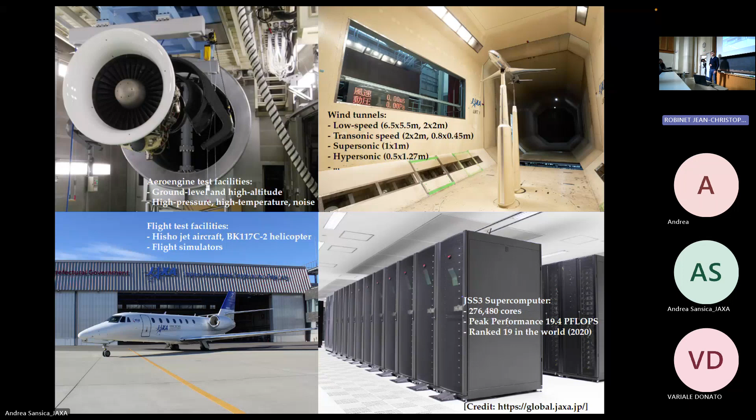We have big projects that I summarized this way. The one that I'm not going to explain in full, but the one that most of my activities come from, is this SkyDX. The objective is to drive digital transformation for the entire aircraft lifecycle.

What we mean by digitalizing the aircraft lifecycle: we have roughly 5 phases in the aircraft lifecycle - design, certification, production, operation and maintenance, and disposal. The objective is to create and provide simulation tools that aim at reducing, not replacing, physical testing.

So if we create a so-called digital twin from each of these phases, we want to do simulations and testing on the virtual model that is going to be much cheaper and quicker. But today, there are many projects, and I am mostly involved in the certification by analysis part, so that's what I'm going to talk about today.

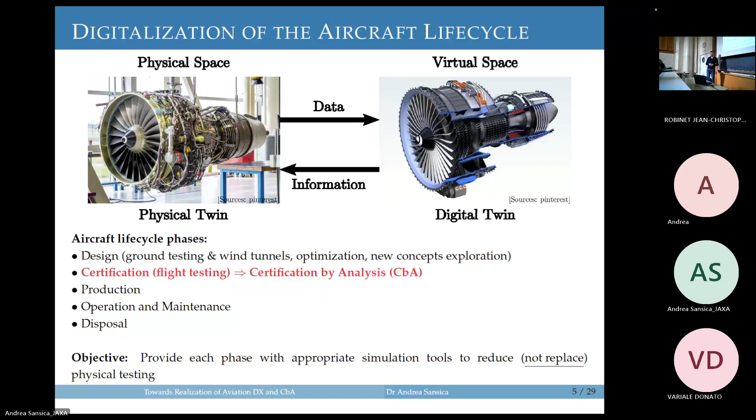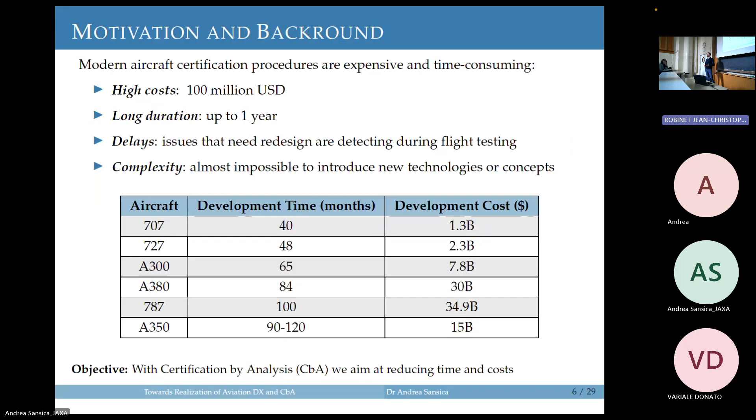And specifically, certification can take a big bunch of this development time and costs. Often during certification, during flight testing, we find some issues that require redesign and then cause delays. The systems are becoming more and more complex, and it's very difficult to introduce new technologies. So CbA targets these problems, and the idea is we want to reduce time and costs - certification by analysis.

So we have two streams of research activities at JAXA. The first one is trying to regulate CFD for those regions where CFD is working well. And the second part is trying to extend CFD to the whole flight envelope.

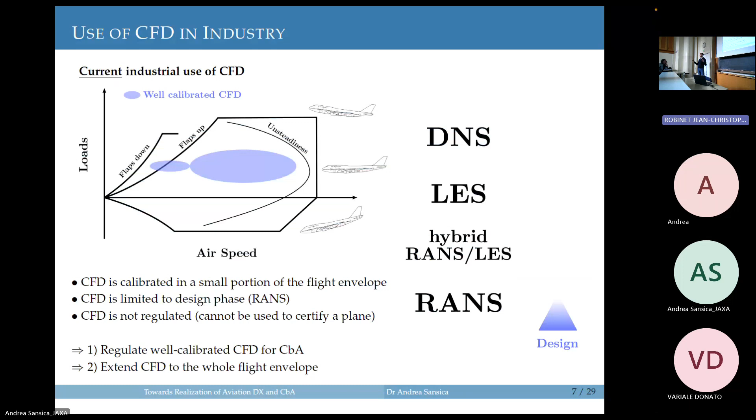For the regulation of well-calibrated CFD, we recently created this project called ChainX. It's coordinated by JAXA and partnered with major industries like Mitsubishi, Kawasaki, and Subaru. Interestingly, the Japanese certification authority is also involved, because we want to propose standards and regulations for numerical simulations, and at the end of this project we will also have a simulated certification review.

So we want to put everything in place so that numerical simulations can be used for certification. But that one is a bit more documentation-based, administration-based, regulation-based, and not so research-related, let's say. Extending the flight envelope is what research activities actually aim at.

How we want to achieve this extension to the whole flight envelope is by increasing access to HPC and using modern solvers with modern architectures. We want to move from only RANS to a little bit higher fidelity methods, and use them not only for design, but also for certification.

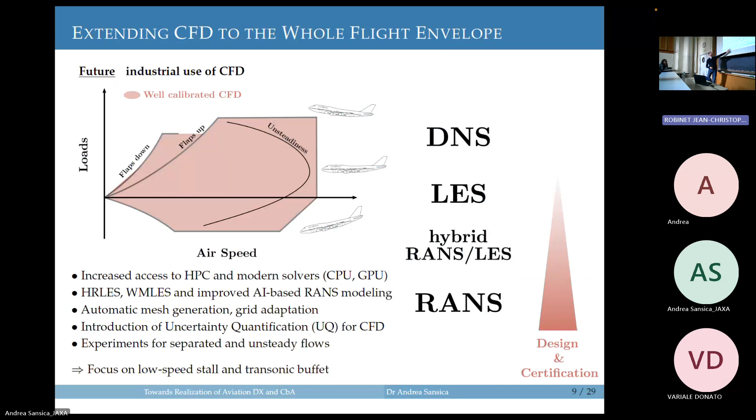So for the sake of this presentation, I will focus mostly on these two configurations: low speed stall and transonic buffet. Let's start with the experiments.

It's been more than a decade now that we have this transonic wind tunnel, which is a 2 by 2 - I should say 2 meters by 2 meters, because if you talk to the Americans, they think it's 2 feet by 2 feet. So it's relatively big.

We have the NASA CRM model, which is one of those we use for many experiments aimed at opening data. Over the years, measurement techniques have evolved, and we started from simply getting aerodynamic forces to now having unsteady PSP or high resolution steady PSP.

We provide this data for a domestic aerodynamic prediction challenge - pressure sensitive paint. It's like a high lift prediction workshop or drag prediction workshop. We provide data, it's domestic, but everybody performs the same simulations.

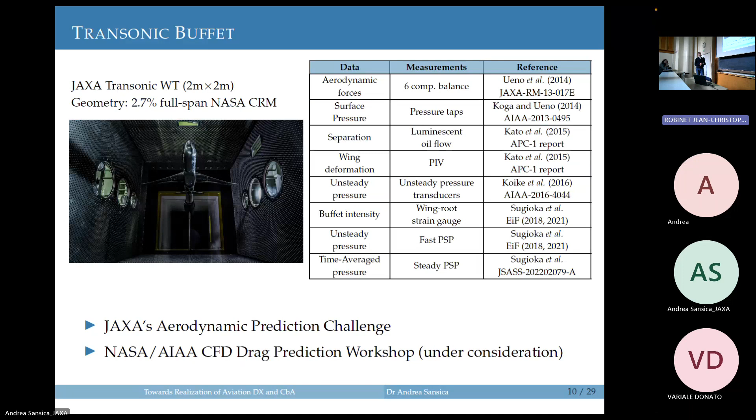Since last year, I had to organize this, and I decided to move from buffet to stall, because most of our activities are actually on stall. It's been a big change, because in previous editions it was on buffet. So far this has been mostly used domestically within Japan, but I'm now part of the committee for the DPW, and the idea is that we provide experiments for this much larger workshop to compare against.

In 2025 we will do experiments, and again we will open the data for everyone, so that it can be used in prediction workshops, and also as part of some collaborations we have - trilateral collaborations with DLR and ONERA on CL max.

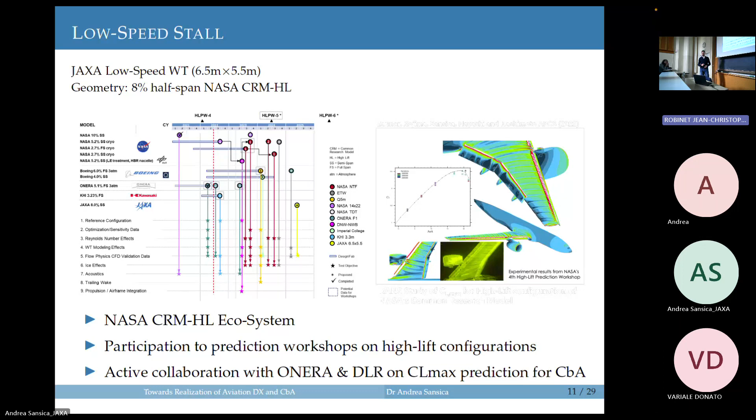But let's move towards numerical tools. A very rough grouping of different types of simulations - for CFD, if we want a little bit more accuracy, we probably would target multi-fidelity physics solving tools. It takes longer, but it depends on what you need to do.

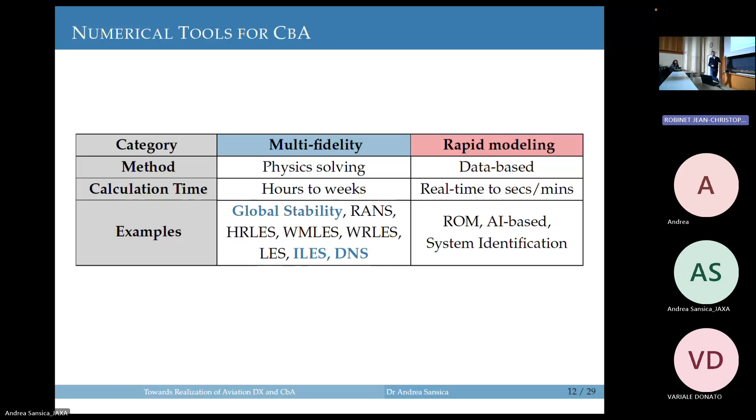I guess it's of interest, and a little bit on higher fidelity simulations. Starting with high fidelity simulations, this is the work that David Lusher did. He used to be a fellow who got a fellowship from the government. Technically he was in JAXA, but for the last couple of years he took OpenSBLI, a code he developed during his PhD, and extended the capabilities of this code to target buffet.

Now he has been hired at JAXA, and we want to do a similar thing, but for finite volume of unstructured grids.

I imagine you know how these kinds of things work, but I'll explain it quickly. We have the user specifying governing equations. As long as you can write it in index notation, in theory you could solve any equations. You'll specify input parameters, boundary conditions, and there are some libraries and availability. The code, the framework David developed, takes these equations and automatically generates C code.

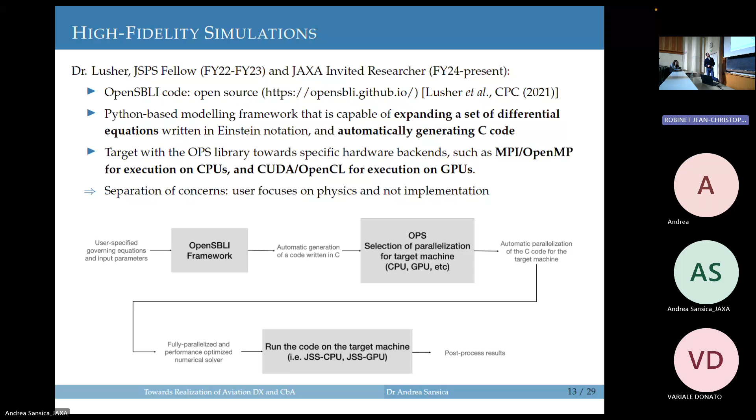At this point, the C code is sequential, and it's given to this domain-specific language library called OPS. It's developed in Oxford, for structured grids. You can select which target machine you need, and it will automatically parallelize your C code. Since these libraries are developed by software engineers who really know what they're doing, they're usually optimized for the target machine. Then once you get the code, you just have to run it and get your results.

Some of the simulations we could do with this tool - I call it implicit LES, meaning we don't have subgrid scale models, we just let the grid stay unresolved to introduce some dissipation - we also went up to DNS. We did calculations of up to 10 billion points, very large simulations on a relatively small number of GPUs. We looked at different sensitivities, at the appearance, intermittent appearance of these buffet cells. These were relatively simple geometries.

It's just an airfoil extruded with periodic boundary conditions. But yes, for CBA, as well as trying to understand more in detail about the mechanisms, we also use these large databases for model training.

In terms of outreach, we are writing some stuff. David won this award last year for this work he did, but now we are more focused on publishing. Some are already under review, some in preparation. We plan to present, if accepted, some of this work at IUTAM Transition. Soon, hopefully, this version of OpenSBLI will be released, and it's open source, so it can be used by anybody who has resources.

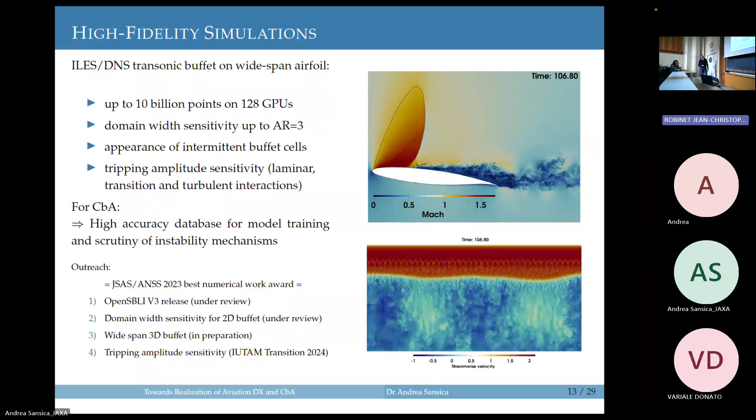Moving to stability, most of the talk will be about this. Now, I guess I don't have to explain what global stability is, but just for the sake of completeness, I'll go through it quickly.

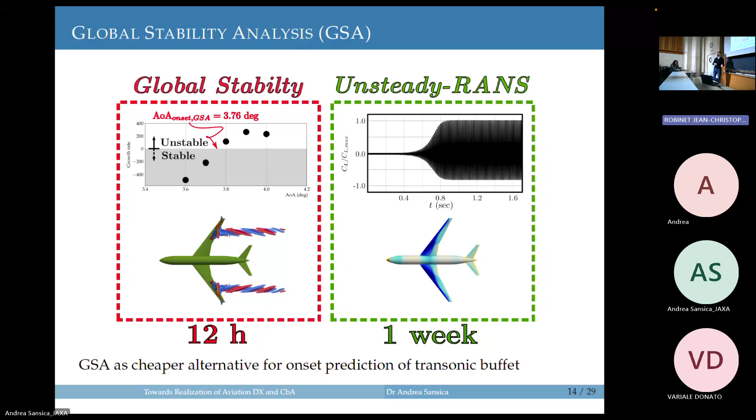We use it because for certain types of phenomena, like if we want to predict transonic buffet onset, if we do stability or more classical simulations like unsteady RANS, stability can give you a very large computational saving, especially if we are close to the onset, where these simulations will take a very long time before they settle and before you understand whether the case is steady or unsteady. GSA can be pretty useful in these cases.

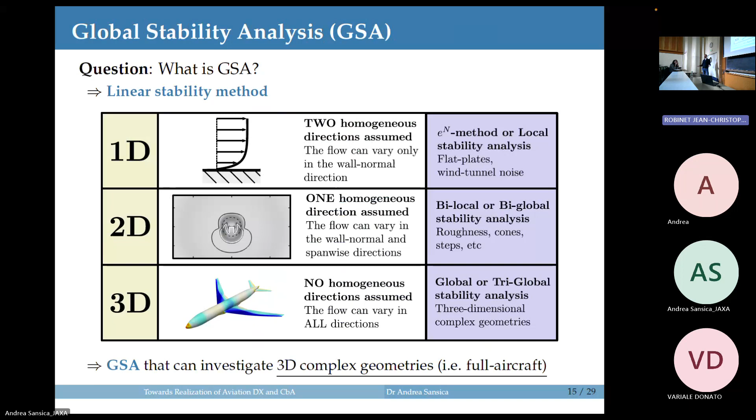It is a 3D stability calculation. We don't make any homogeneous direction assumptions, so the flow can vary in all directions. We can deal with very complex geometries like a full aircraft. This is as opposed to local or biglobal, where you assume 2 or 1 homogeneous directions - not that these are bad, but if you want to do a full aircraft, you cannot assume homogeneous directions.

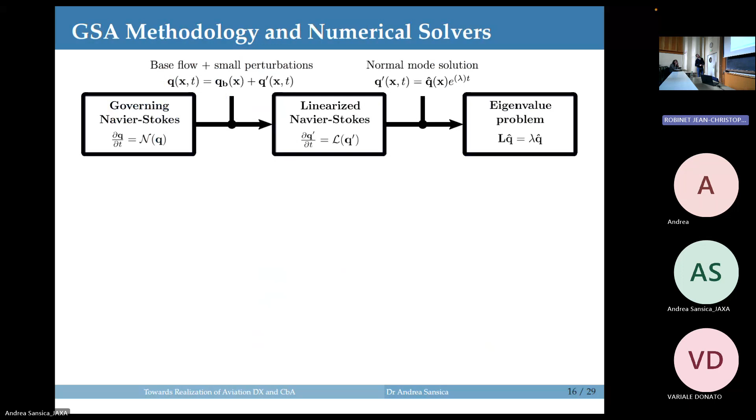Yes, the framework is a relatively classical stability framework. I know you know all these things, so I'll skip a little bit. But we have 3 main challenges when we do stability. First one is calculating the base flow.

Phyllis will be happy about this, but in the RANS-based GSA framework, the base flow corresponds to the RANS solution. So I simply use our legacy code, some unstructured finite volume code that is FaSTAR.

The other challenge is deriving and implementing the linearized solver. I will explain a little bit in the next few slides, but basically we need a linearized discrete solver called FaSTAR-GSA. And then solving this eigenvalue problem - this L matrix is the discrete linearized Jacobian, so the size is number of degrees of freedom times number of degrees of freedom, so it's very huge.

We need to solve it in a RAM-efficient way. So what we did here, it's a time stepper, what I call Jacobian-free system reduction, and you solve the eigenvalue problem on a much smaller matrix. We recently published this paper where everything is well explained, I hope.

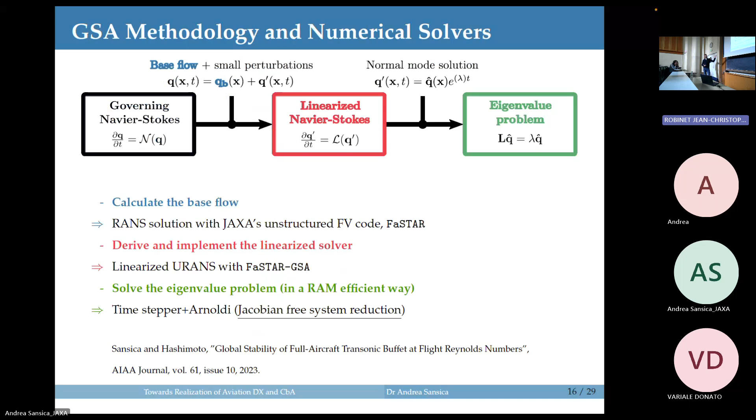But of course we will discuss this a little bit more in detail, about linearization and the eigenvalue problem, because it's something a little bit different from what I was doing here. So this is a schematic representation of what time integration would be for an unsteady calculation.

We start from a given initial solution, and then we start integrating in time, and for each time instance, every delta t, we advance our solution in time. So this is like a simple time integration that you would do for a URANS code.

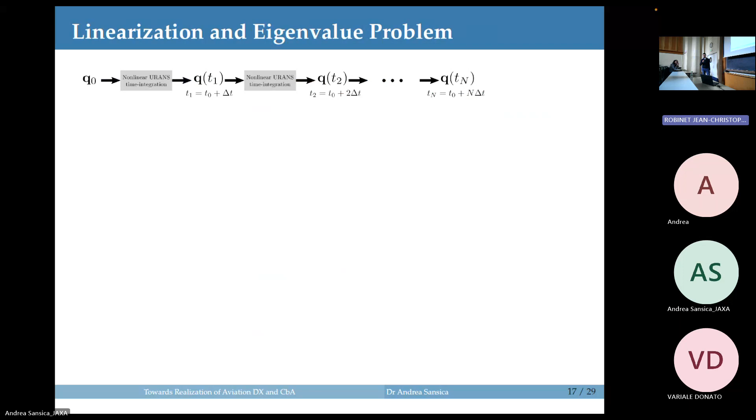For the stability analysis, what I did was: the initial solution is your base flow plus your perturbations, which are pre-multiplied by this amplitude epsilon. I don't actually linearize the routines, but instead start advancing the nonlinear solver up to a certain delta t of Krylov, so after n delta t of small t.

Then I do a Taylor series expansion truncated to the first order, and calculate after orthonormalizing. I populate my Krylov base, I populate my Hessenberg matrix, and what I get is the perturbations for the next iteration. Then I put that here and restart this.

Once I'm satisfied with the size of my Krylov base, I perform the eigenvalue problem on the Hessenberg matrix, which is very small, and obtain the spectrum and project the modes. So the linearization part here is different from what I was doing before, where I was actually linearizing every routine. In the next slide I try to list pros and cons, but yes, this is a bit different from what was done here.

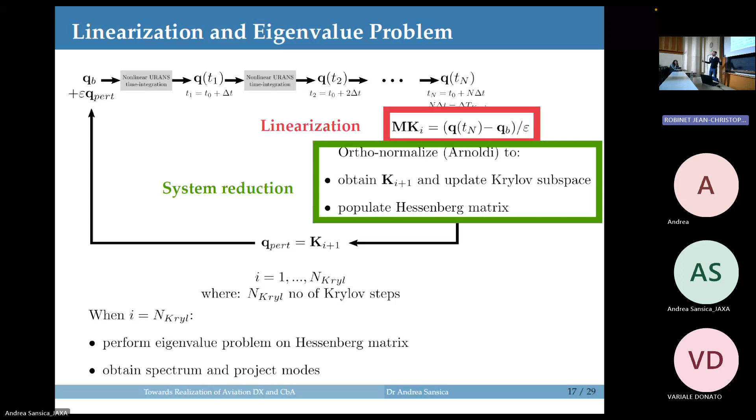This part is exactly the same, but it's important because it's the enabler for doing GSA on very large grids. We don't have to extract the Jacobian, like for example is done in ONERA, and we can therefore do it on very large grids. You will see in a few minutes what kind of grids we did it on.

So, pros and cons, rough list. With this linearization technique, we don't need to linearize any routines. It's very useful, for example, if your turbulence model has step functions that need to be regularized. As a matter of fact, you don't have to linearize anything, so you can simply use your code and all its features, and do sensitivity studies and so on.

Excluding the discussion about what the base flow could be, this could also be applied to higher fidelity methods, and as I said, we can deal with large 3D grids.

On the cons side: the base flow must converge very, very well. If it's not at machine precision, if it saturates at a certain level, you will start having spurious modes, usually steady and unsteady spurious modes that you have to deal with somehow. It's very important to converge the base flow well.

The delta T of Krylov cannot be too large. We are actually running a nonlinear solver, so if the nonlinearities grow, then your stability simulation is invalid.

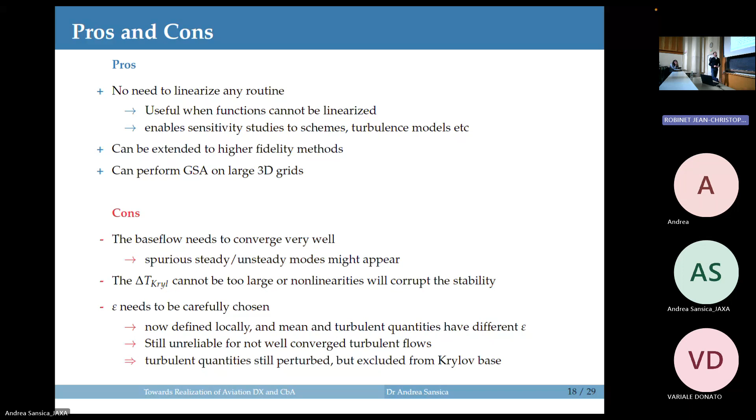When the base flow is not converged, I still have problems in the presence of turbulent flows. So at the moment, what I'm doing is perturbing the turbulent quantities but not including them in the Krylov base. There are some issues with this that we can discuss later. I have some slides on it, but the idea is that this way it's very robust, and not bad, as you can see.

This is a little bit of a roadmap. I started from the incompressible cylinder wake for initial testing, then did some validation against literature for the transonic airfoil. The first 3D configuration I did was this swept wing with sidewalls from experiments at JAXA, which was not very successful — I will show you why. But probably the most interesting thing I'll focus on is the full aircraft for transonic buffet.

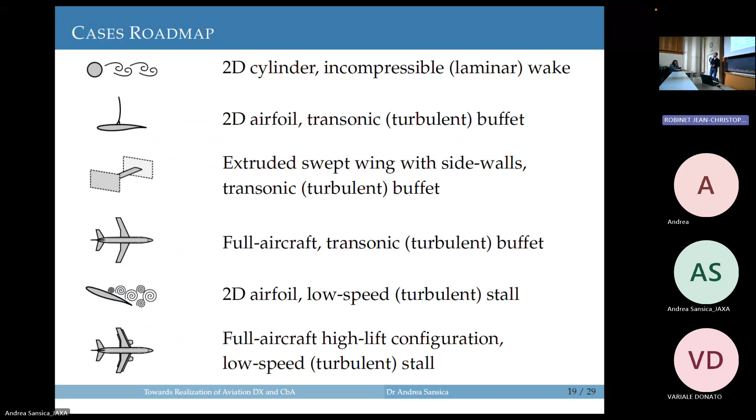So of course, if your base flow is not good, your stability result automatically will not be good. This is a study that should be improved at some point.

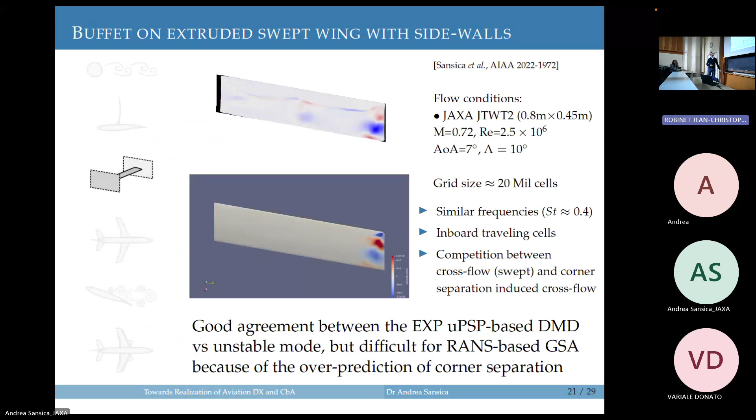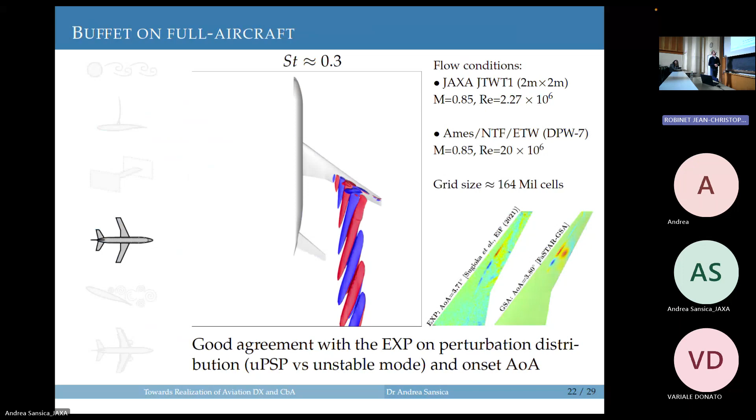But when we did it for the full aircraft transonic buffet condition, previously the grid here, we started having relatively big grids for RANS, 20 millions. But here we started moving to a little bit bigger, and this is something already that if you want to extract the full Jacobian, it will be quite difficult.

I will explain a little bit in detail about this later. This is very new things that I presented last January at SciTech. So low speed,

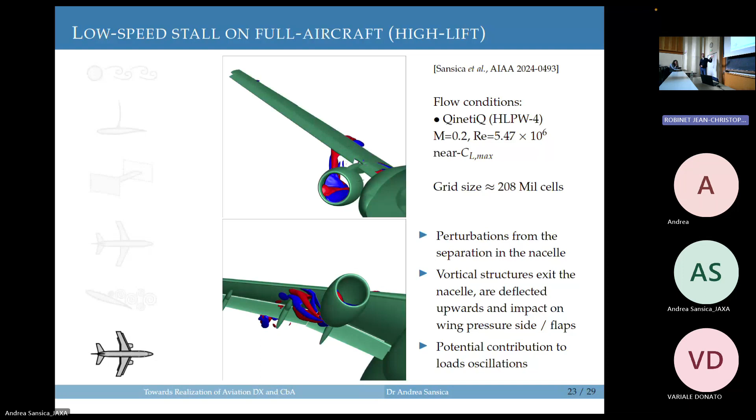Yes, the nacelle is empty, but because it's on the experiments in real life, there will be an engine. But if you do experiments in a wind tunnel and you want to compare your CFD with, you must know about this phenomenon. But now, yes, the bigger part, hopefully I'm not too late.

So about transonic buffet onset prediction. The flow conditions have been based on two sets of experiments. First one from experiments available at JAXA. Reynolds number is

I call the wind tunnel Reynolds number. So it's about 3 million, 2 million, 2.3 million. But then I also tested it on flight Reynolds number conditions. It was not a flight test, it was still in wind tunnel, but in NTF at NASA, where they can go up to 20 million Reynolds number.

Yes, always these two, FaSTAR and FaSTAR-GSA, respectively, the base flow and the stability calculation. The geometry is the CRM body wing. Actually, there's also tail, so this is wrong. But we considered experimentally measured wing deformation. So it's rigid wing, it's not fluid structure interaction here, but we considered the fact that the wing is deflecting.

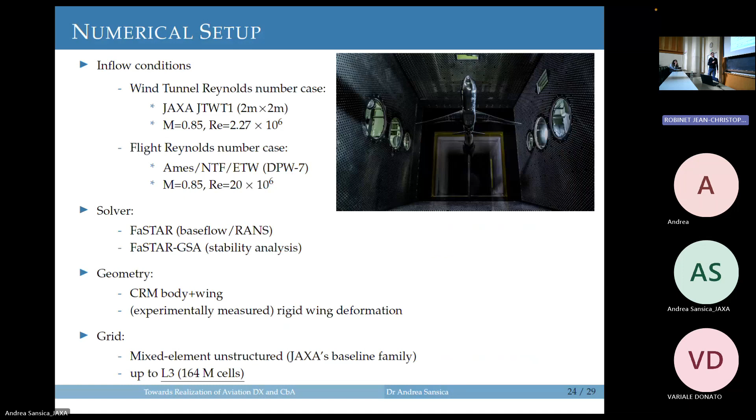And yes, we tried a bunch of different grids and results here for the finest that we got from transonic buffet. That is about 164 millions. Of course, first thing to do is to make sure that your base flows, in this case the RANS solutions, are of good quality. So we compared against available experimental data.

In this case, you see CP distributions at different wing sections. And the agreement, this is for a low angle of attack. And

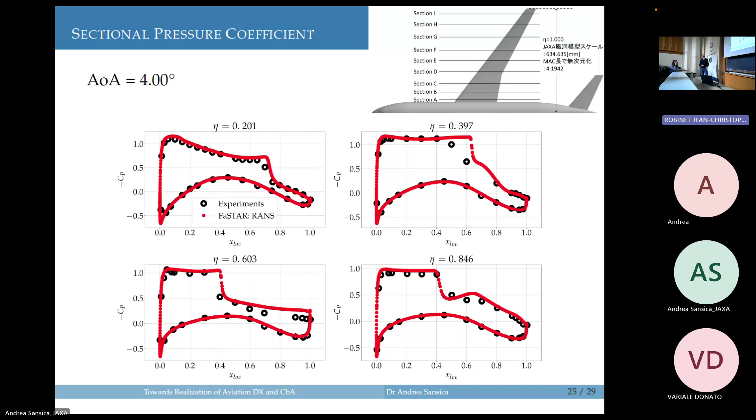In terms of aerodynamic forces for lift, drag, and moment, so the red circles, they correspond to the results that we got. So these are in very good agreement with some other contributions from participants from the prediction workshops.

So this shift, it's not something that we only had. And as a matter of fact, in these workshops, we decided, let's do an arbitrary shift with the idea that this groups all the experimental unknowns. And when you apply the shift, things start matching very well. But of course, it's a bit of an arbitrary shift.

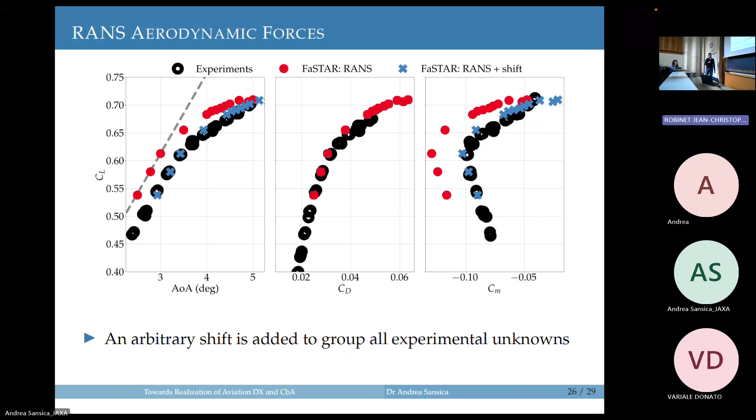Looking at the solutions, so if we look at the CL alpha curve, this is what we have for different angles of attack. For each angle of attack, we have a base flow, and for each angle of attack and base flow, we did stability. But it was interesting, I think, to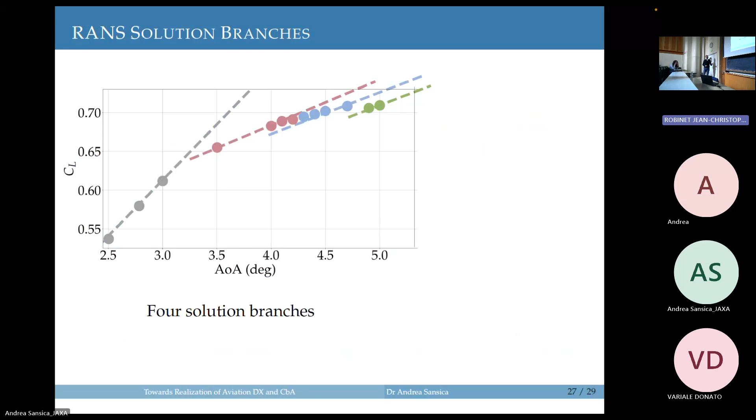identify roughly 4 solution branches. The first one here, where we have a very linear trend of lift with angle of attack. If we look at main wing, and this one, here's the junction between fuselage and wing. So this is an important junction where usually you have side of body separation. But for this first branch, we have fully attached flow.

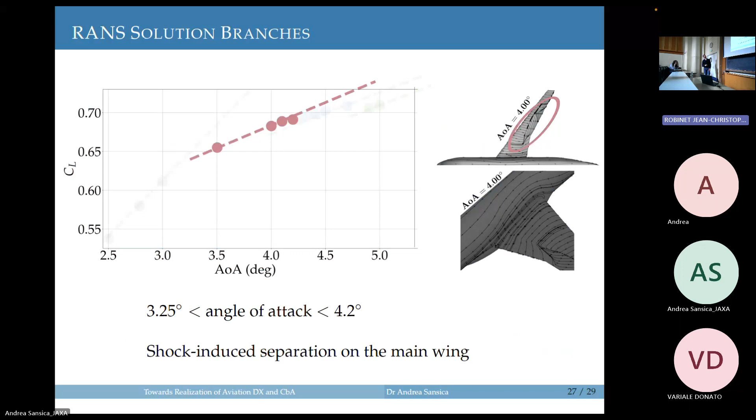For this second branch, where we start seeing the lift not following the linear trend anymore, we start having separation on the main wing. For this other branch, we start having this side of body separation. And in the fourth branch, there's a significant drop in CL, caused by this side of body separation that becomes very large. So for all these cases, we did stability.

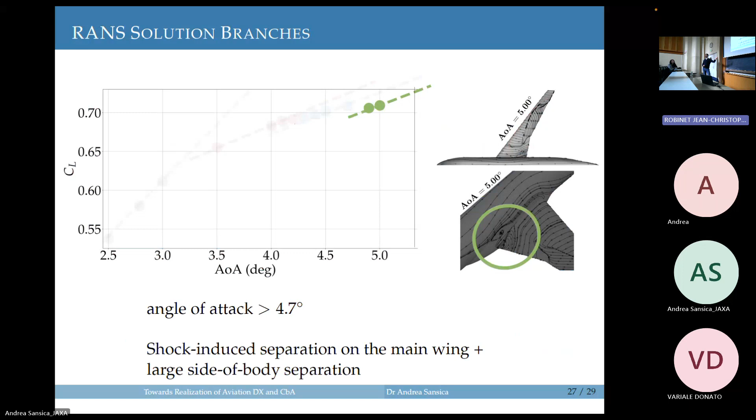And so this is growth rate and frequency versus angle of attack. So when the growth rate becomes positive, we will have unstable base flow, and we will have buffet onset, let's say. The light blue line is the experimental onset angle of attack that was measured with strain gauge on the wing.

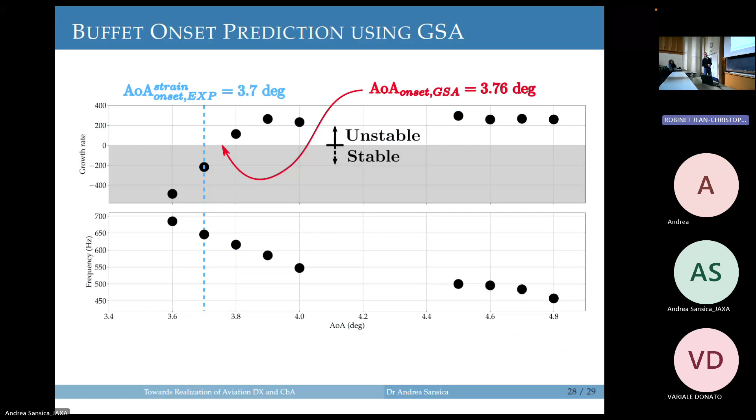So after a certain level of vibration, they considered buffet onset. And as you can see, the one predicted by GSA was pretty good. Once we move far from onset, things start being a bit different because the base flow and the mean flow change significantly. But if we are near the onset, what we found was one unstable mode.

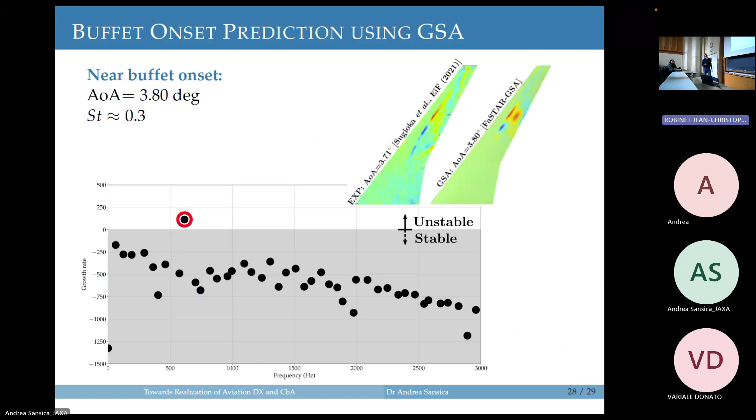The GSA mode is represented here and compared to some available data, so this would be pressure fluctuations from the unsteady PSP. It was nice to see, and of course the comparison is not super fair, but it was nice to see that it was very similar.

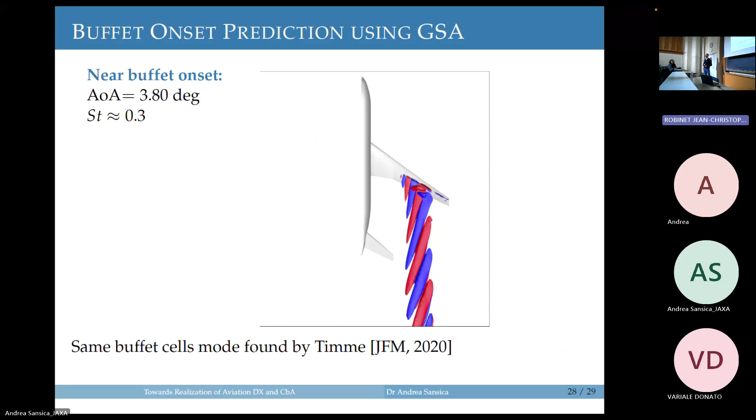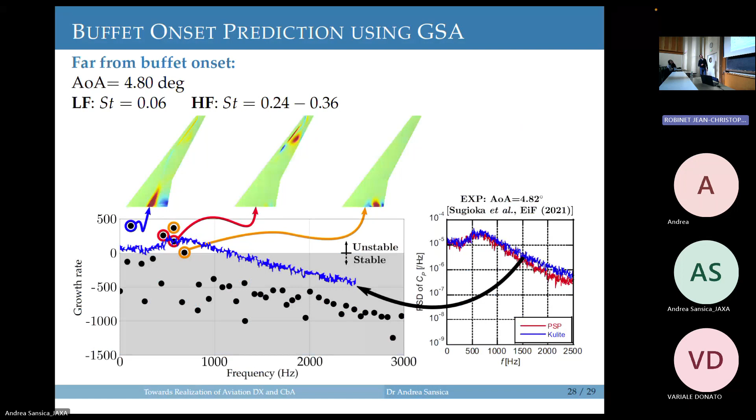And three-dimensionally, this mode is very close to what Sebastian's team in Liverpool found, concerning this appearance of buffet cells. But what we did was move a bit forward, and also far away from the onset we started having multiple modes appearing, and compared to spectra from PSP and Kulite, they were in a similar range.

This is the mode that was existing also close to onset, which Professor Timme also found. What we found interesting was this mode, whose Strouhal number is very close to the Strouhal number of 2D buffet on 2D airfoils. I call it quasi-2D because it might still be buffet cells, but now with a very long wavelength. So I was speculating that this is what 2D buffet would be for a 3D configuration.

And then since we had side-body separation in this body-wing junction, there was also another mode generated there. The interesting thing is that these modes actually hit the tail as well. So it can be interesting from a load point of view.

These results are for the wind tunnel Reynolds number case, but very similar things I found for the flight Reynolds number case. So I just show this.

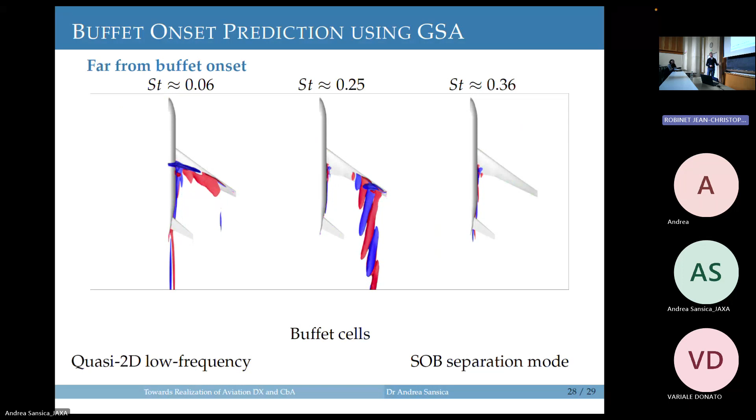Yeah, actually, that's it. A little bit of advertisement, I would say. So in Japan this year we will have two big conferences: first ICCFD, that Paula is organizing in Kobe in July. Paula will come to JAXA after that, so we're very excited for a seminar.

And then there will be a IUTAM transition conference in September in Nagano. So I took this chance to try to organize a mini workshop focused on buffet. It's like a second edition of what was organized a couple of years ago by Professor Timme and Professor Sandham at Liverpool and Southampton universities. We fixed the date, UGC has been helping with the organization, and we agreed on doing it just before IUTAM, so there's an opportunity for people to come in person.

I'm trying to organize a visit at JAXA as well as the workshop. So if you're going to IUTAM, or even if you're not, the event will be hybrid, so it can be followed online. And if you're not a buffet specialist but still want to join, you're more than welcome. It's just going to be presenting and sharing latest publications.